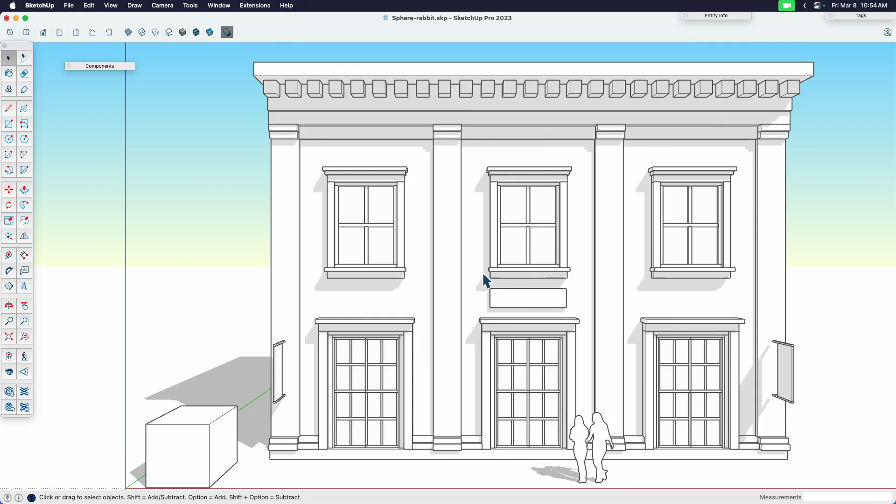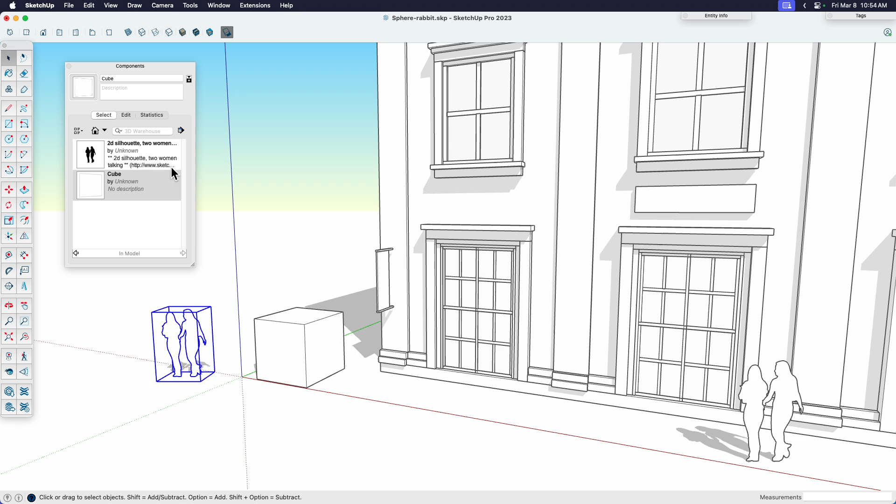So this is my model. I wanted to show you really quick, to prove to you that this was all done using just a single cube component. There's my component. If I open up my components window, you can see I'm in model, and that was an old one. So if I go model info, purge unused, there you go. So there it is, I've got just my people here, and I've got just this cube, which you see is already sitting here. So I'm going to delete that. Anyway, that's it, just one component.

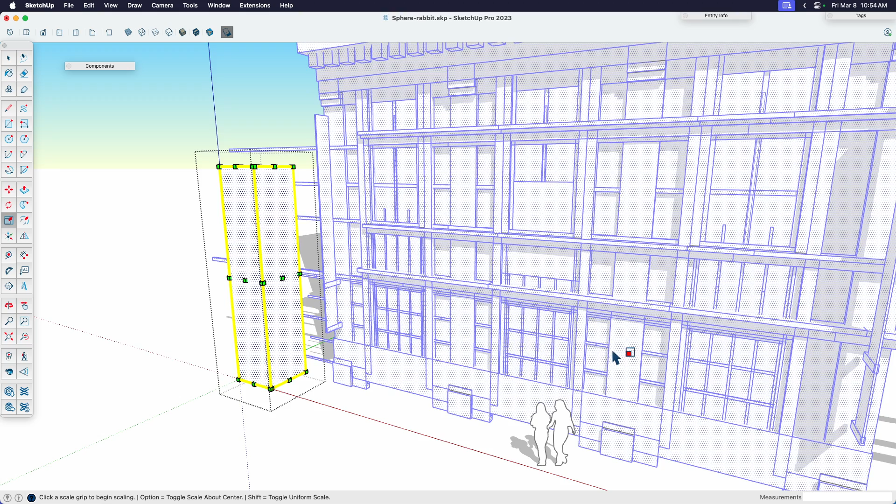Let's go take it a step further. If I actually go into that component and modify it, I'm just going to use the nonlinear scale by vertical, and you can see you get something a little cool, but not exactly what I was intending. So when I say you may not want to do this method, you're probably thinking, well, why would you want to do that? Well, you wouldn't want to modify the inside of a component because it's going to modify it everywhere. Instead, what we do is modify the outside of the component.

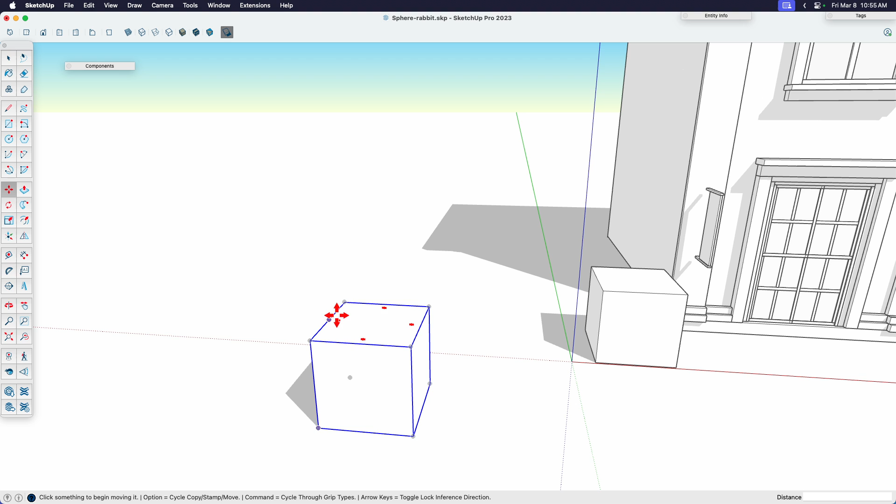So let me do a little example off to the side here. I'm going to pull this cube over, the same cube again, and practice. You can use the icons if you're an icon user, but I'm a keyboard shortcut user, so M for move, and I'll hold Option or Control to make a copy. So this is what you're going to see, I'm doing the same thing over and over - grabbing this cube, making a copy of it, and then deciding what I want to do.

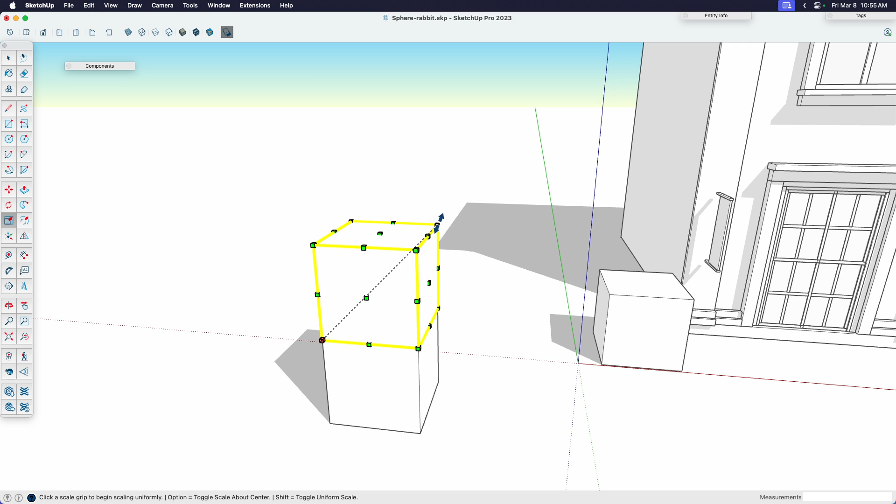I can scale it from the side, or squish it to make it thinner, or pull it to make it bigger and taller. Or I can grab it from the corner and do a uniform scale, and again hitting that same Option/Alt modifier to create a uniform scale from the center point instead of from the edge. So that's what that modifier does.

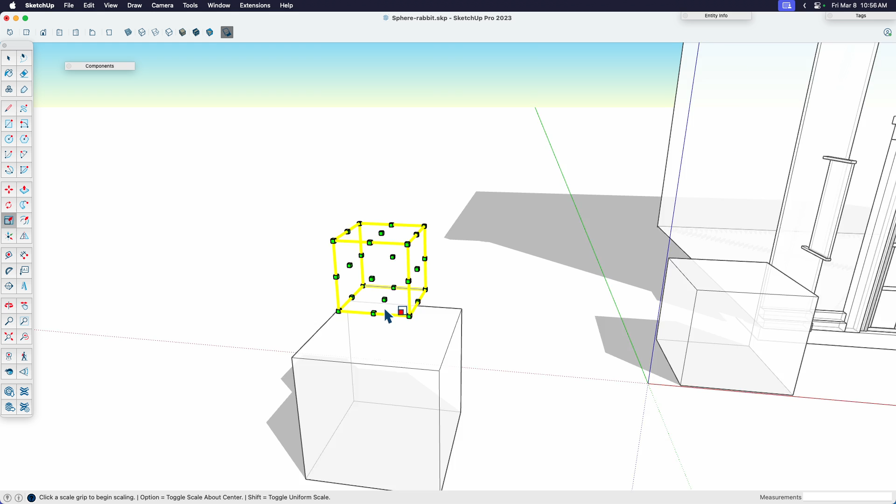This is really cool. In this case, I could use this scale tool, and if I need to, turn on my X-ray mode so I can grab a grip I can't otherwise see, and snap it to the geometry that's already there. Now if I knew exactly how tall I wanted it, even without knowing the dimensions, but knew how big this cube was, I could say I want this to be 5 times taller, or 7 times taller. So if you know the proportion you're working with, you can always just enter the number that way.

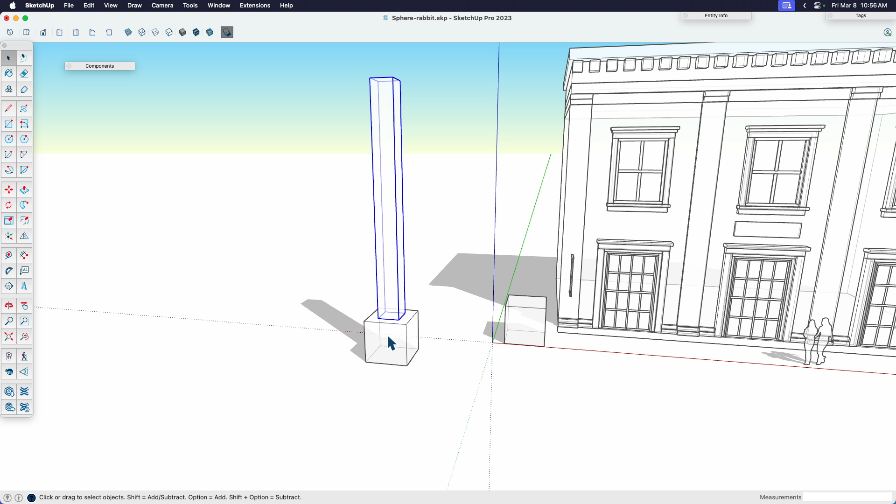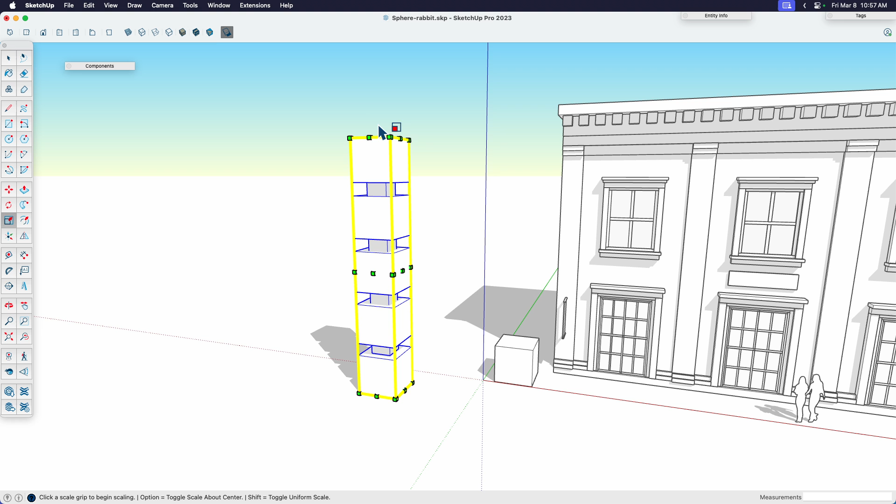In this case, I also want to grab this cube here, make a copy, and just play around - I'll divide this by something like 6. Nope, maybe too much, divide it by 4. This is kind of cool because you can do these complex arrays. So even with this cube group, now I've got different versions. If I wanted something to be twice as big, I could just multiply by 2.

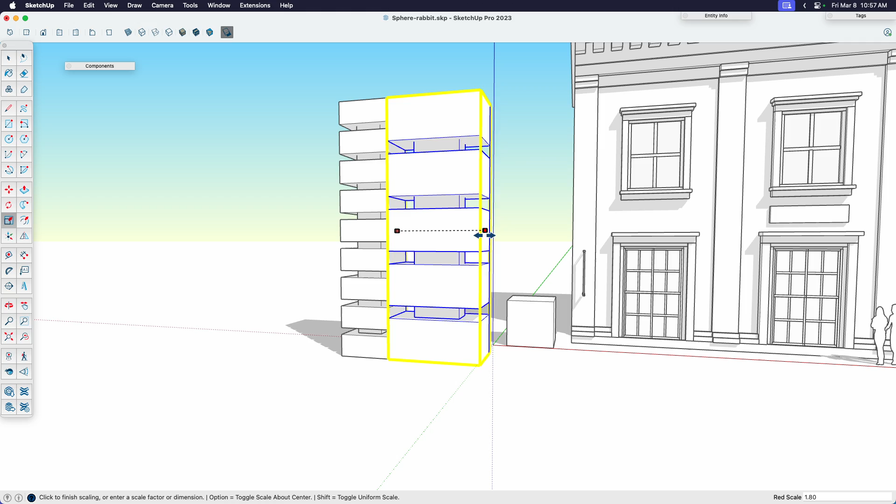Why would you want to do this? I'm not sure, but if you're doing something conceptual, or building something like spaceship parts, this could be a quick way to create variety using just the same component. I'm copying, stretching, scaling, rotating, and having a little fun, thinking more about how something looks than how big or exact the dimensions should be.

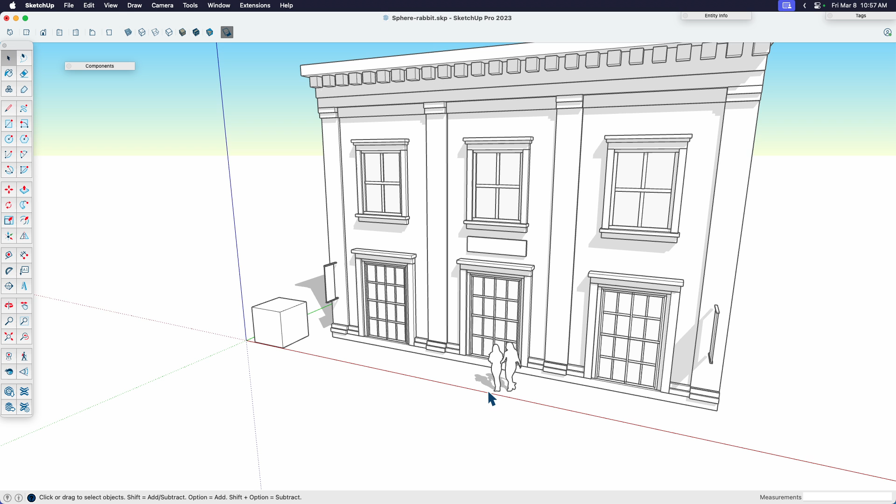So let's go back to this house or building and use something a little more concrete, literally, because I need to finish it out with the sidewalk. I'm going to grab my cube, the same cube, and use the same technique I just showed you in that demo.

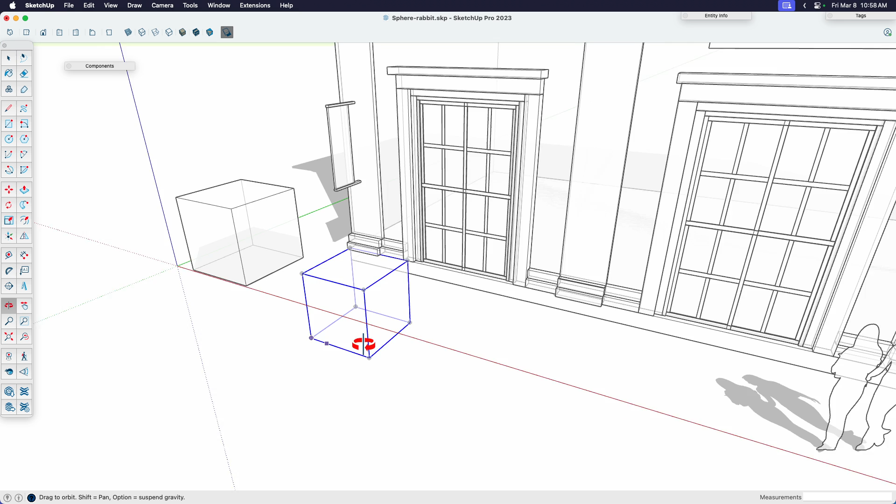I'm going to turn my X-ray mode on so I can find a corner that's easy for me to snap to, using a keyboard shortcut to toggle that. I want to grab that grip and snap it in place, using the building's existing geometry as my reference.

I'm going to copy this over. I don't know how many I want because I'm not working to any real dimensions. Let's just say times 10 to see how far that gets me. I like to work in even numbers. And there you go.

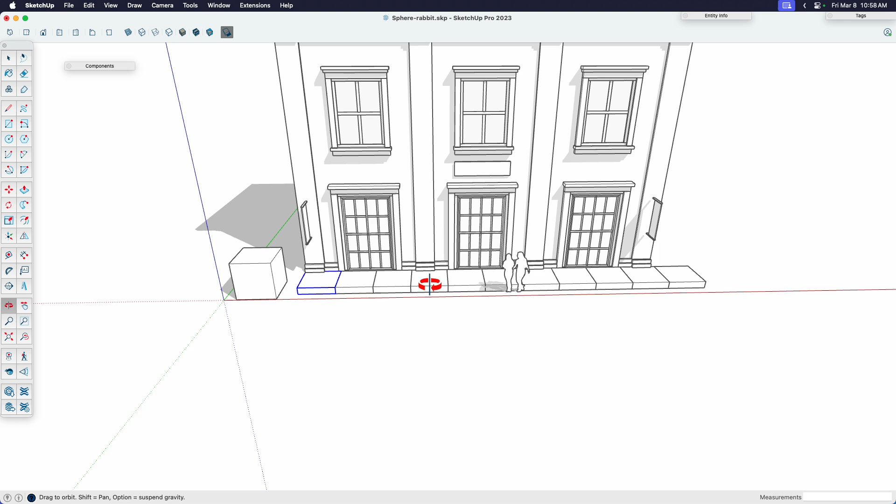If everything is grouped already, a really quick way to select all these is to come over here and say select all instances, so you can see every instance of this component. If I'm using the same module for my pavers, I can select one and it'll select all of them. I'll deselect that one, of course, since that's my original.

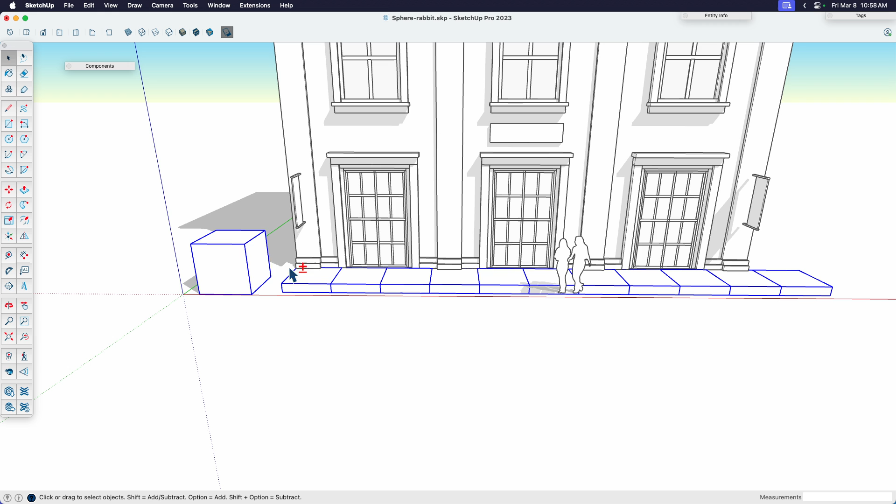Then I'm going to make a group out of this, and from there just stretch it into place. Again, I don't know how big that is or how big it needs to be, it just looks okay. If I wanted to change the number of modules, I could do that by scaling it, but I'm okay with how this looks.

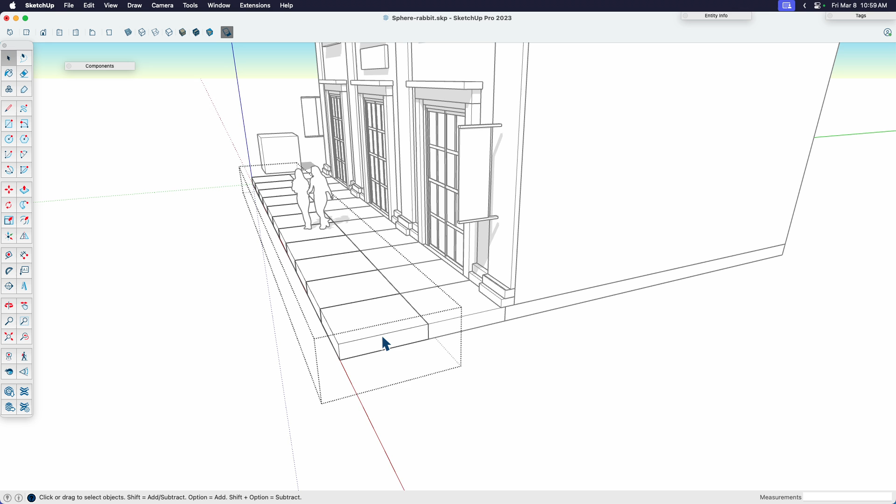So again, I'm going to copy that. We'll do that times 2 - excuse me, let's try that again. I want to do multiple modules. So this last module here, this is where the tree grates are going to go, and sometimes you'll see a different size paver there.

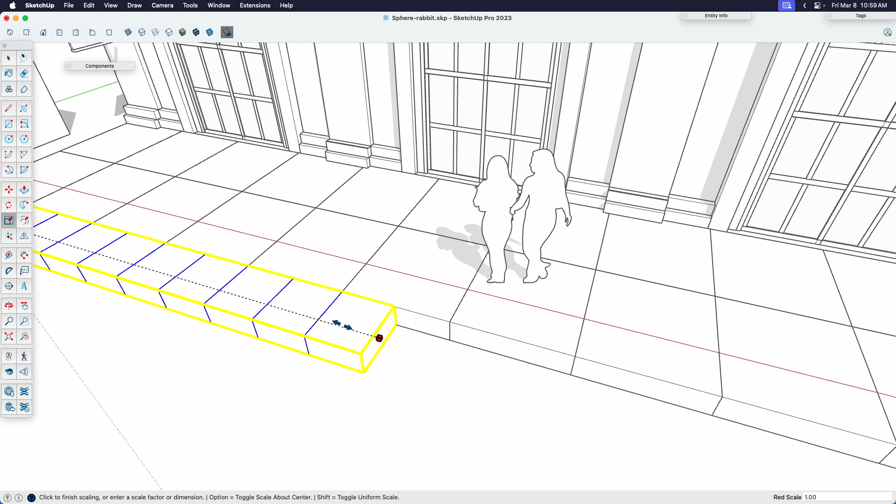In this case, instead of redoing that array, I'm just using scale with the non-uniform grip, scaling along the red axis, and then I say 0.5, which is half of my other one. I know that instead of 10, I have 20 in here.

So I can group those together as well. And if I wanted to make that a little bit longer, I just grab another one of those modules. That's pretty cool, I just finished my sidewalk out.

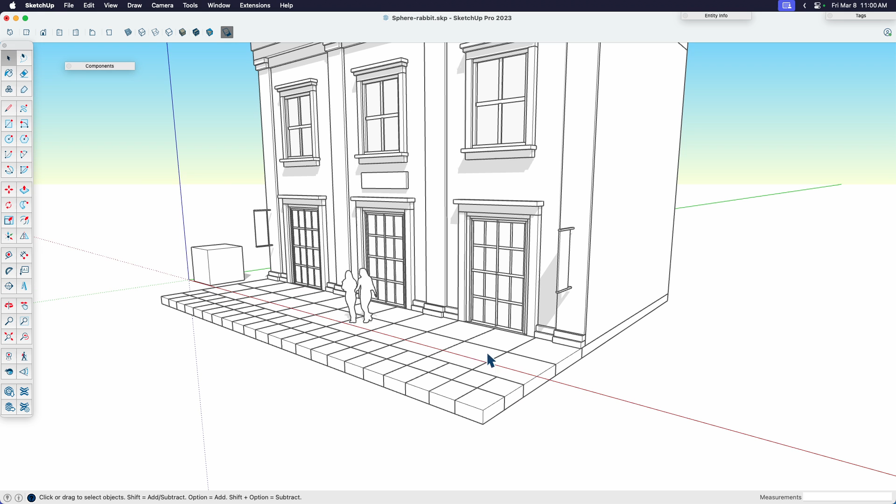If for some reason I wanted to differentiate the sidewalk, there are two ways to do that. If I just want to differentiate the color, I could come over here and paint the outside of my sidewalk. I'm going to make sure I'm showing my textures and paint my sidewalk module there. Again, still one component - if I edit the whole model, everything edits.

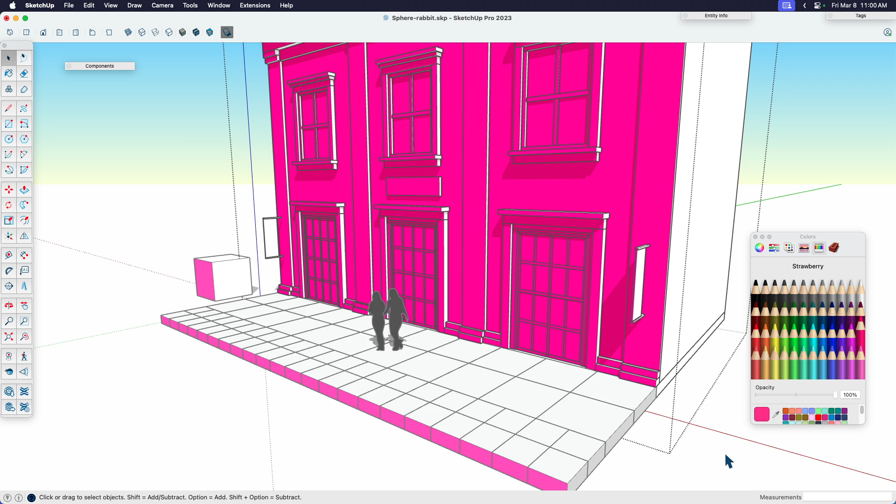Some people say you really should paint the inside of the component. Of course, if I go in and paint the inside of the component, what it's going to do is paint everything that same color. And maybe I don't want everything to be that color - maybe I want certain things to be certain colors, even though I'm using one component. I can still do that just by painting the outside of stuff.

If I wanted to paint this sign here, for example, I could just come over here and paint, or I could paint the whole thing, or I could come into the group and paint that sign. Let me make that a color that you can see.

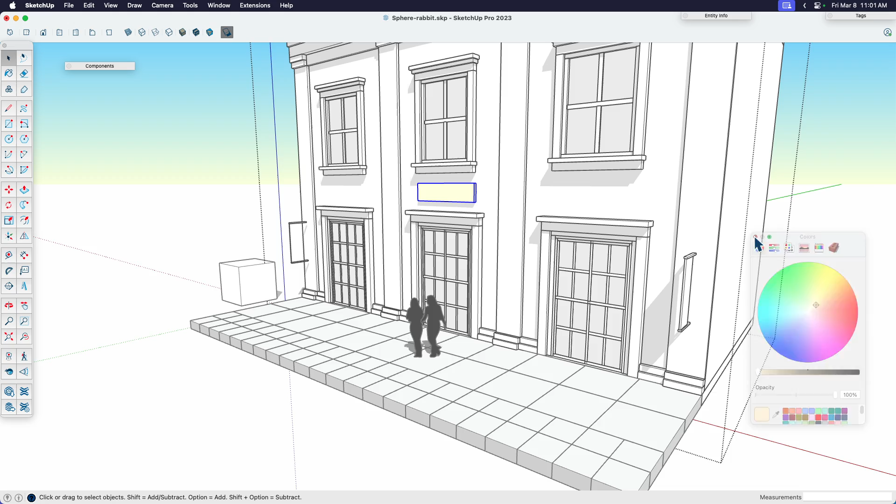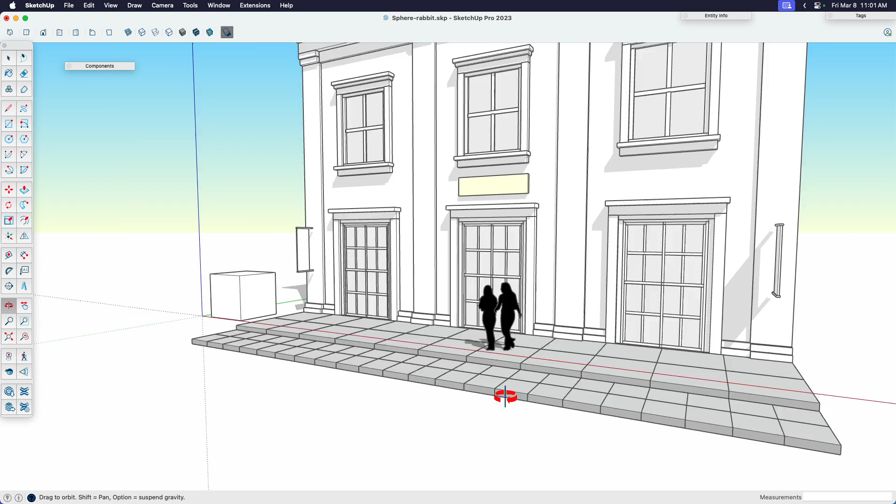There we go. So again, a single component made every single piece of this model, and I've differentiated it just by using only one tool, which is the scale tool. That's it. All I did was scale it, and I'm also just snapping it to the geometry that's already there, or I'm using the measurements box to say how far I want it to go. If I wanted to do that as 0.5 or 0.75, I can create more variations of this same module using just scaling by a scale factor.

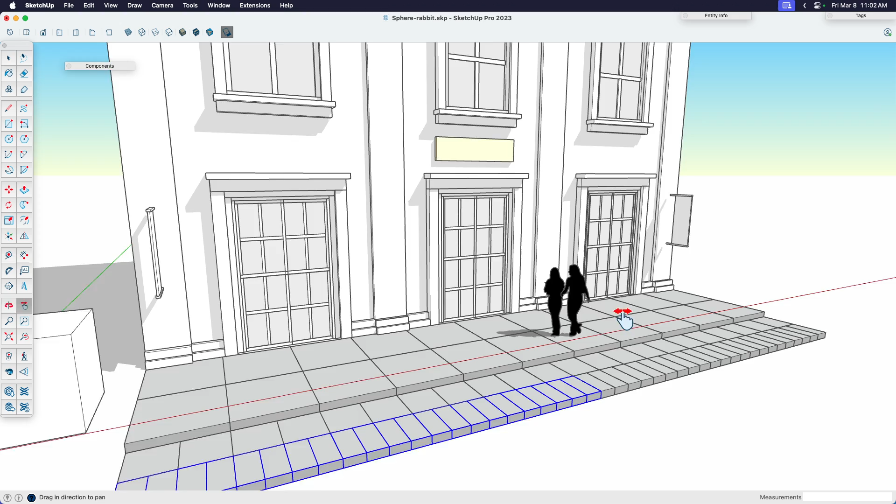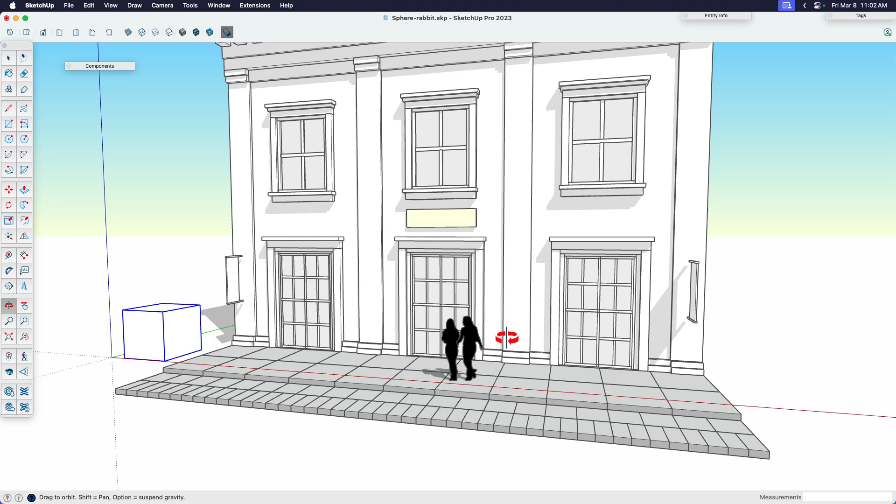And that's pretty cool. Obviously this is geometric, so it works that I'm building a model that makes sense using a cube and rectangles. You can, of course, go organic. If you wanted to bring in two components and you have an arch, think about what I could do with just two components. An arch and a cube could do quite a bit. So I'm stripping this down to its bare minimum, which is just one cube. But you can push this idea or technique as far as you want to go.

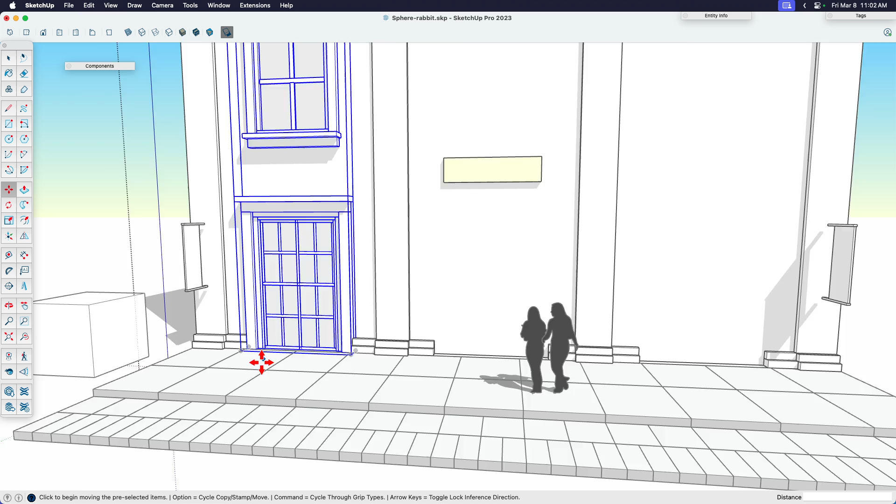And of course, you don't have to stop there. You can also make components of groups. So in this case, I can make a component and call this doors and windows. And now I have two components in the model. I have one cube, and in this case, let me make sure I'm actually snapping this to the right point. Do that times two. And you can see now, if I opened up my components window, there should be three in this model.

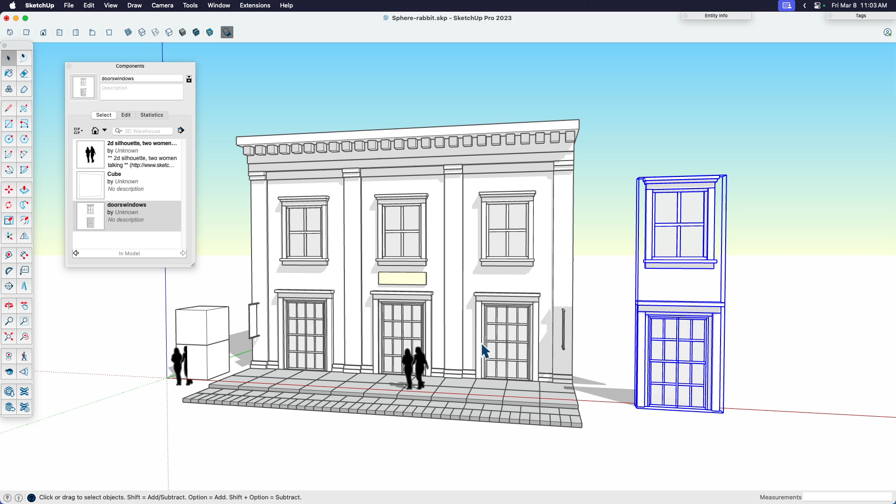There is the people as before. There is my cube, like when we started. And now I have a new model, which is a new component, this grouping that's created that I use to create the doors and the windows. So again, now I'm starting with just one component, but I'm not going to limit myself to that. It makes sense that if I knew something was going to repeat, like this window, if I wanted to move it or scale it, having this be a component group, because I know it repeats, is definitely a smart modeling technique.

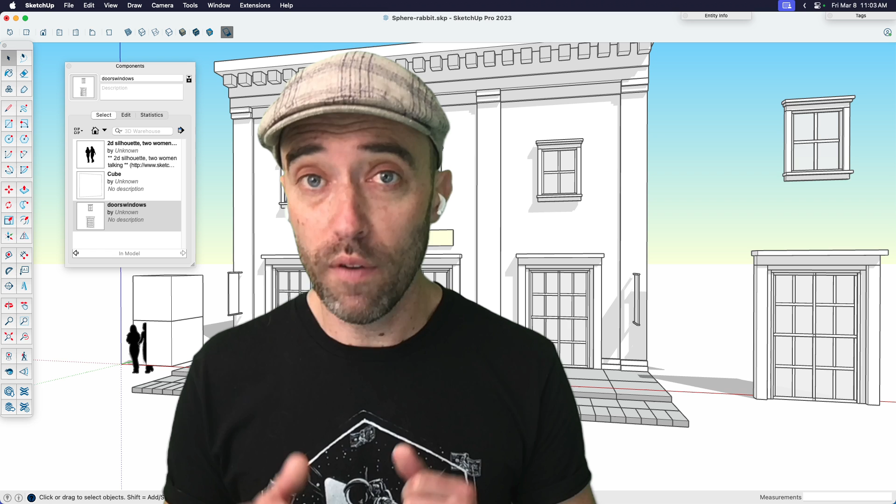So I'm going to stop there because you get the idea. The whole point is that it's a simple way to model. It's super fast, and it's also super flexible. Because if you find yourself modeling and then you need to do something a little different, you can always make a component unique. And then that component is no longer going to, if you have to go in and actually edit the inside of the component rather than the outside, blow up your model like you saw when I first stretched it, when I first was playing around with that original cube.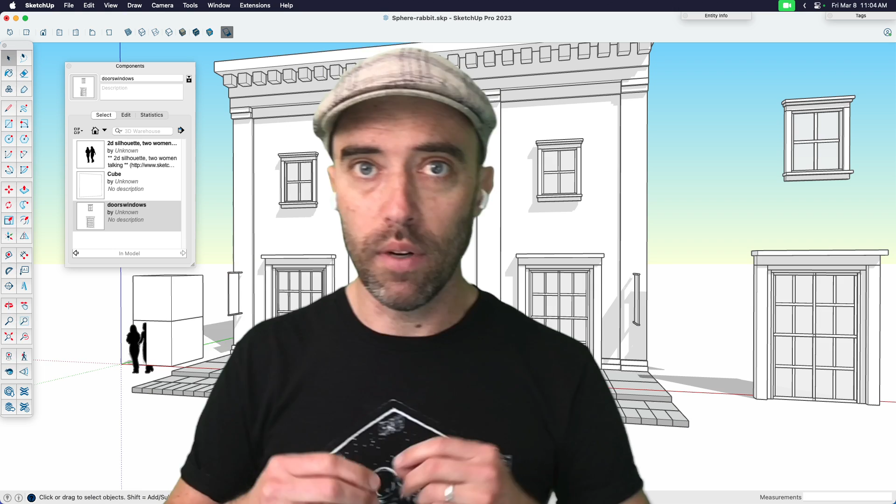So the idea of exploding components, making them unique, painting the outside of them, and adding more than just a single cube, it's a pretty robust process. Again, not something you're going to build a house with and then send to construction documents, but something where if you're building a stage set, or building something for game art, or just doing some visualization and having fun where exact dimensions don't matter, this technique—give it a shot.